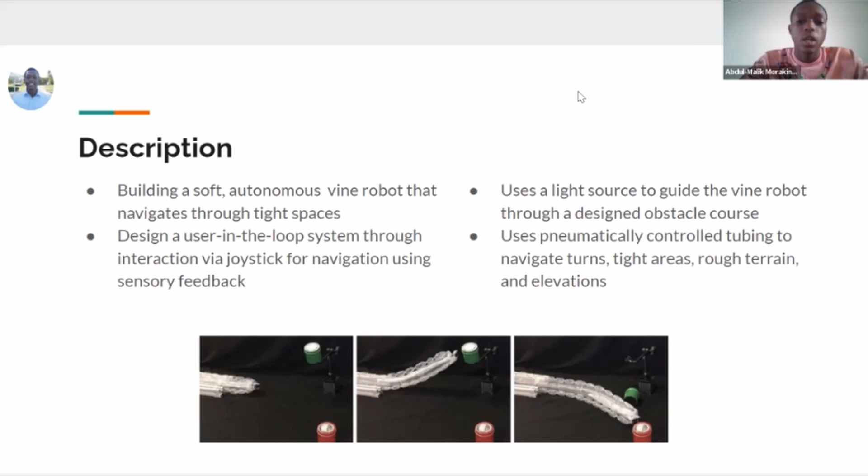The reason behind this project included being able to make a device that can navigate through hard to reach places. This can have numerous applications, such as in the medical field, being able to retrieve small objects within someone's body system, being able to retrieve certain artifacts during excavation sites in archaeology, and also being able to help victims of natural disasters such as earthquakes and provide instant relief.

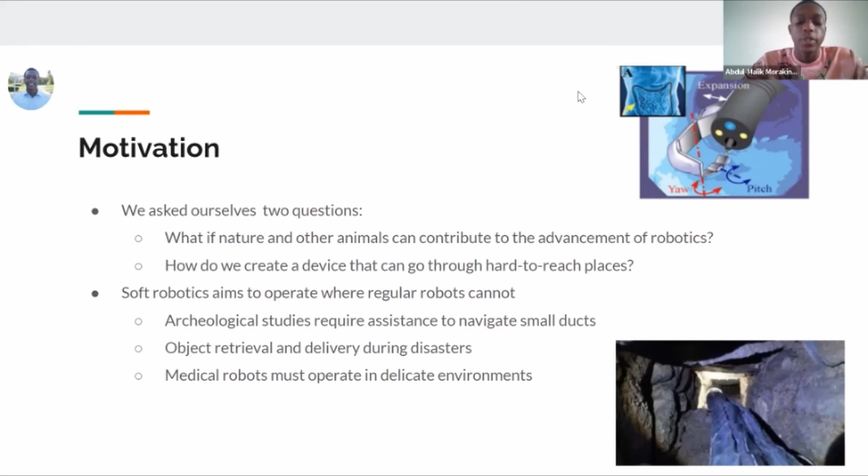Our project constraints are mostly economic and environmental, time and educational, and safety. With economic and environmental, it is hard for us to provide all the funds for this project, being college students. And also with the pandemic, it has also created a constraint on logistical issues.

With time and educational, it's hard for us to devote as much time as we initially thought, because we have other responsibilities as well with classes, jobs, and internships. And educational being the fact that we're still naive in how deep this field is, and we're constantly trying to learn as we go on.

And safety-wise, with soldering components, that could be a huge safety risk because we're dealing with high temperature. And also with the pneumatics, we're also dealing with high pressures. We could also risk other parts exploding depending on how we choose to manage the pressure.

Our goals and objectives, just to reiterate, is to design a robot that can navigate through tight spaces. We'll be using both manual and autonomous mode to help the robot navigate through the maze or the obstacle course.

For our stretch goals, we'll be using a gripper system that can easily retrieve objects at the end of the course. And also in the autonomous mode, we plan to use computer vision to program the way the robot moves through the obstacle course.

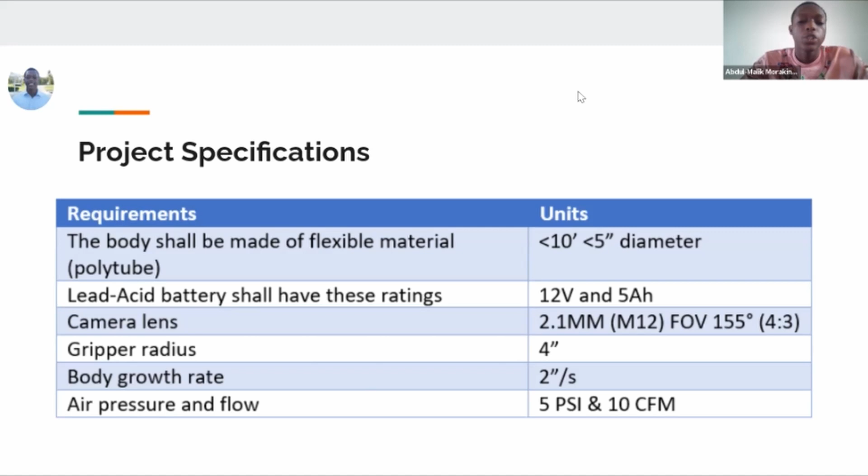Our camera lens will have a focal length of 2.1 millimeters, FOV of 155 degrees. Our gripper radius should have 4 inches, body growth rate of 2 inches per second, and air pressure flow shall have 5 pounds per square inch and 10 cubic feet per minute.

For our project, we have decided to split the major tasks amongst ourselves. Juan will be mainly in charge of the electromechanical design of the project, while Mohammed will be primarily in charge of the PCB design and testing. I, Abdul, would also play a secondary role in this.

As for power design and testing, I primarily will be in charge of ensuring all the power design is accurate to the best of its abilities, and Juan will also provide additional help when necessary. As for the software design, which includes the GUI, Kevin will be mainly in charge of getting it to work and run.

The spool motor and cap connect back to the PCB. The PCB is what allows the motor to be powered up and controlled. The sensor readings are also sent to the PCB, which is then sent to the PC via USB serial.

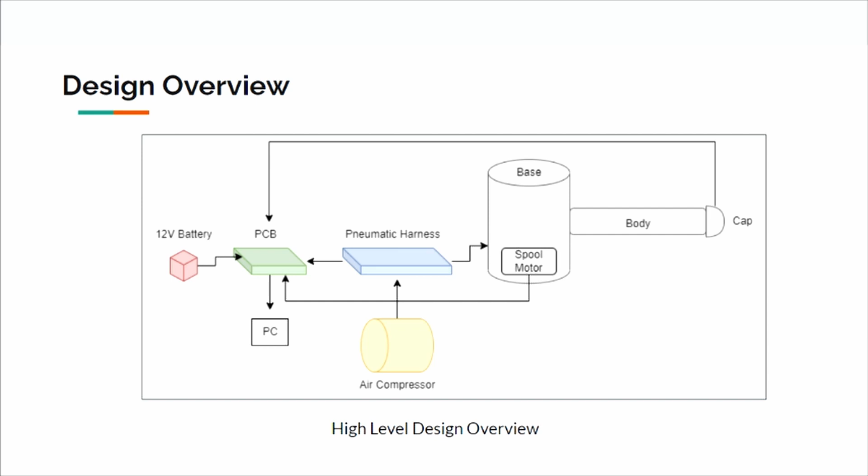So this is our block diagram. Starting from the top left in yellow is our power subsystem. Then in red is our camera and video processing subsystem. Then in gray is our motors. In blue is our pneumatic subsystem. In white is our custom PCB control board. In orange is our robot controller. And in green are our sensors, not including the camera.

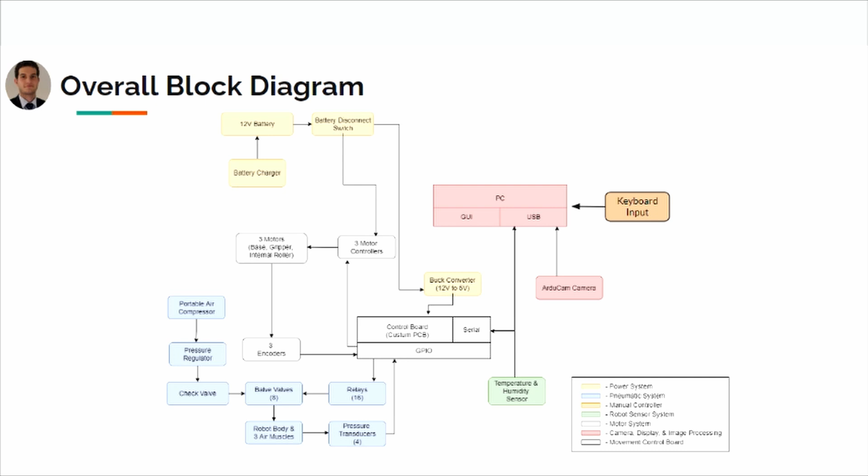Moving on to the mechanical design, the robot body is the part of the robot that is going to be lengthening and retracting. Then the artificial muscles, or SPAMs, are going to be lining the diameter of the robot body and are actually going to steer the robot in any direction that we want in 2D space.

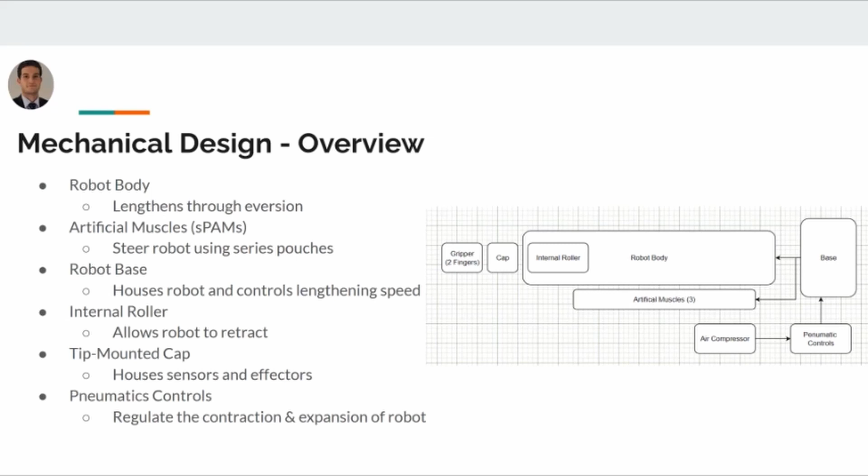The robot base is what houses the undeployed part of the robot, and it also serves as a pressure chamber for the robot body. The internal rollers are at the tip of the robot body, and they aid the robot in retracting onto itself. The tip-mounted cap is actually part of the same assembly as the internal roller and serves as a solid surface for us to mount our sensors and effectors. And the pneumatic controls are the part of the robot that controls all the pneumatic actuators.

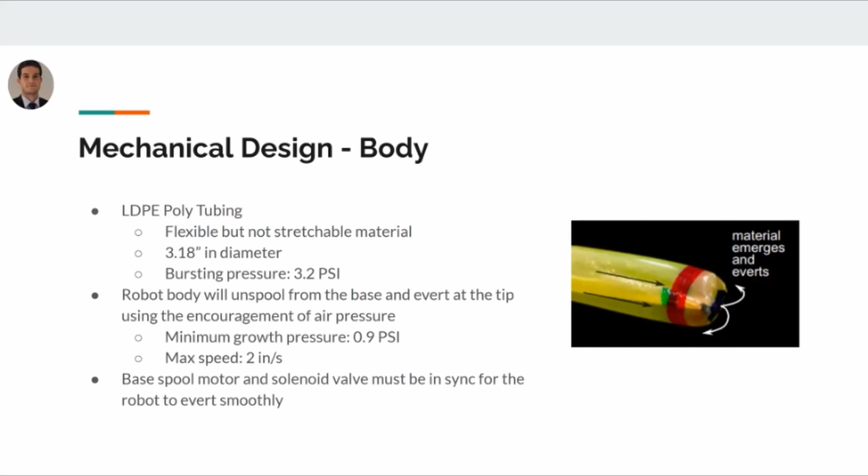Basically, when we pressurize the robot body, it will lengthen by everting itself. The pressure that we need in order for the robot to lengthen is about 1 psi, which is good because our max bursting psi is about 3.

When we were picking the material for the robot body, we needed something that was flexible but not stretchable, so that it would not change size from one deployment to the next when it's pressurized. We could have gone with LDPE polytubing or TPU coated nylon fabric, which is similar to the fabric that backpacks are made out of. The problem with the fabric is that it is about 4 times more expensive than the LDPE tubing, and it also doesn't come in tubular form, so we would have to sew it and heat seal it in order to create a tube, and that's why we went with LDPE polytubing.

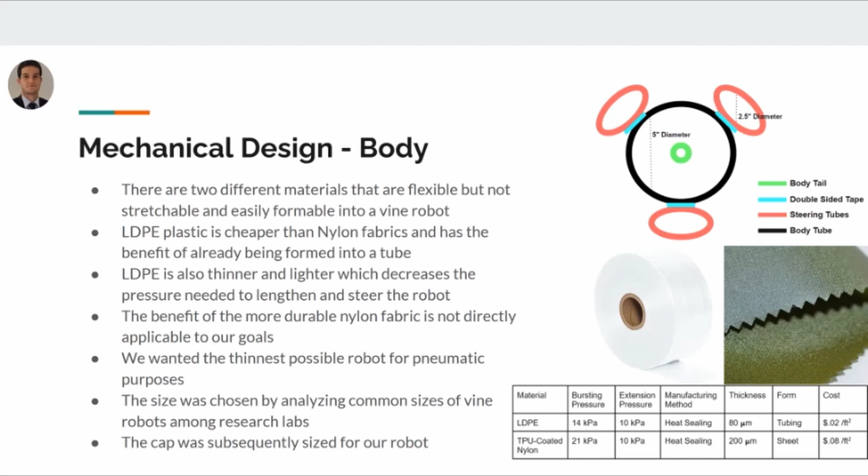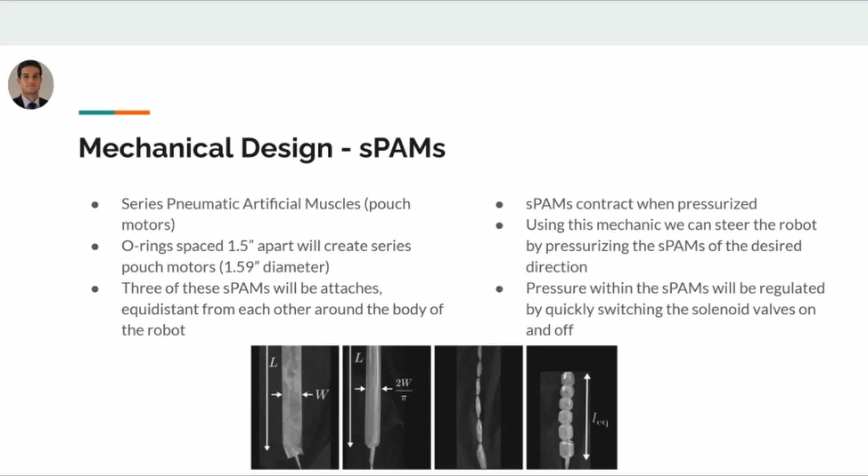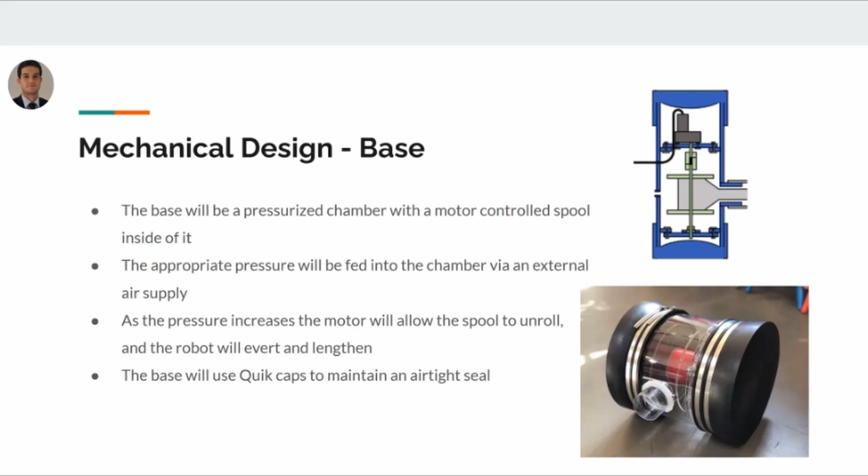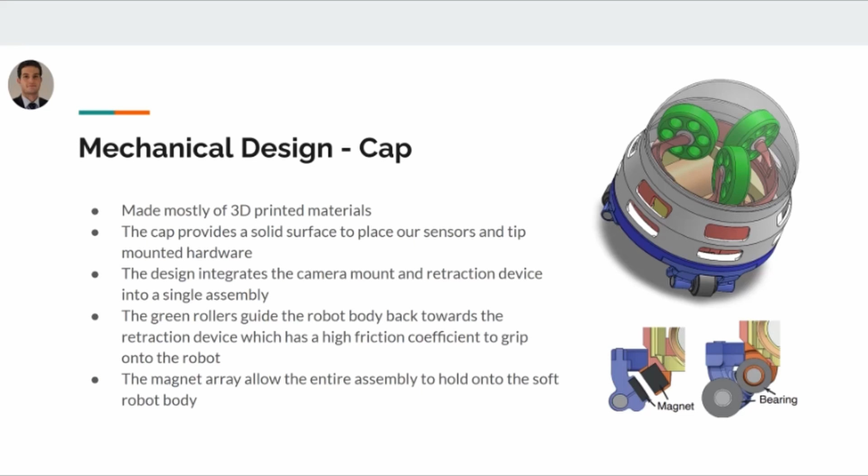The cap is the most intricate part of this entire robot as far as mechanical design goes. It has to be attached to the robot, but also able to slide up and down the material. So in order to attach it, but not permanently, we use magnets and ball bearings. Inside this cap is actually the internal rollers, which you can see here. The internal rollers are coated with this high friction material that is used for us to be able to grab onto it and push the robot material back onto itself.

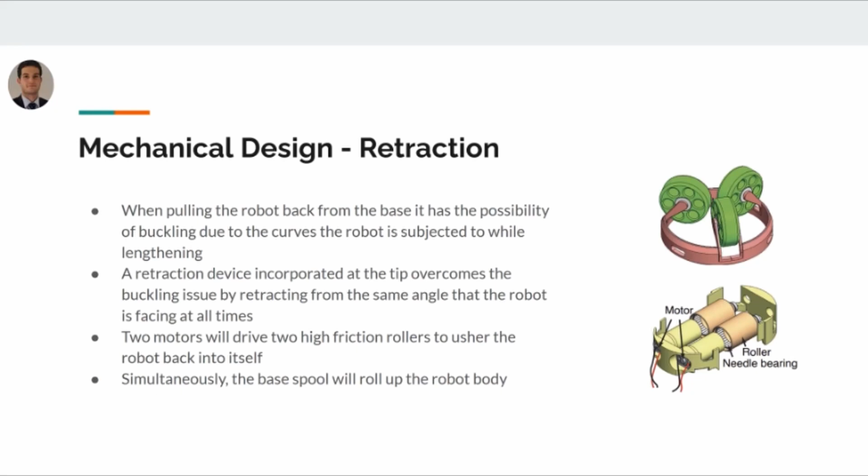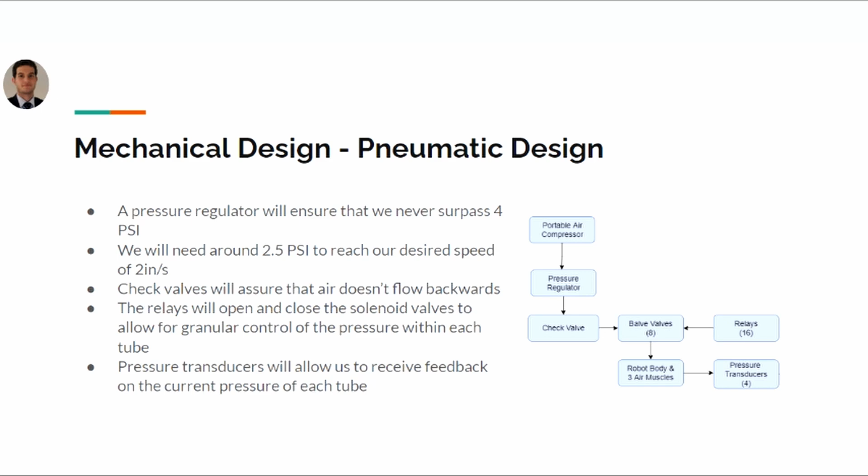So for the pneumatic design, we built a harness that has 4 ball valves, 4 solenoid valves, and 4 pressure sensors. We tested this harness with the PCB and it's working properly.

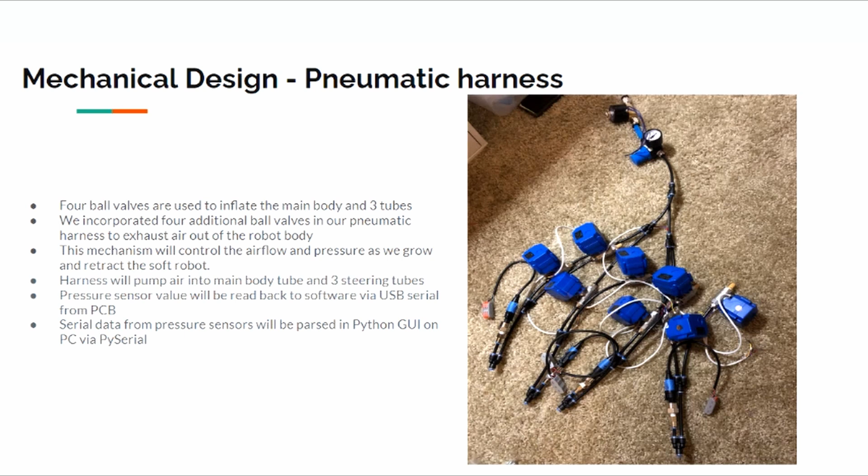The air compressor is going to pump air into the harness, and then we'll use the PCB to turn the pneumatics and ball valves on and off. That would allow us to steer the robot properly. And the pressure sensor values are going to be sent back to the PC via USB serial.

So for the hardware, we have an ATmega MCU that's being used to control the 3 motors along with the gripper motor, and we're also using that to control the pneumatics. We're also going to be feeding the sensor data into the microcontroller, which is going to be sent to the Raspberry Pi. The hardware also includes a joystick and a few buttons that would allow us to control the pneumatics and motors manually.

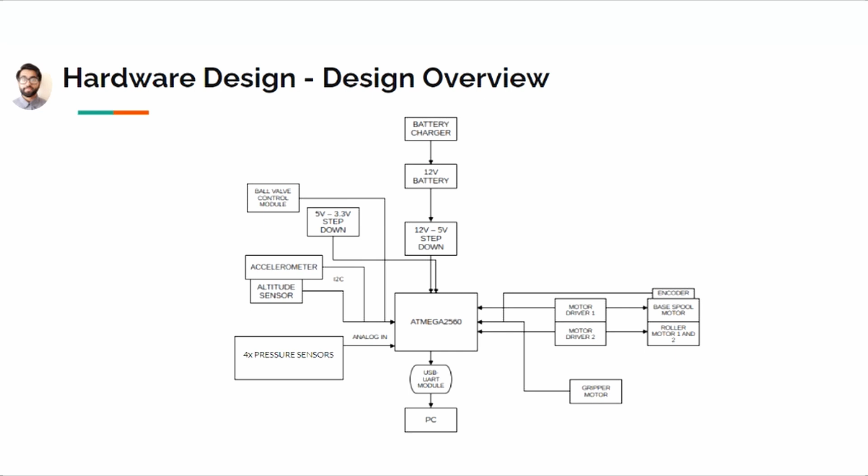So when picking our microcontroller, we were deciding between the ATmega 328, the 2560, and the Raspberry Pi. We decided to go with the 2560 as it gives us ample digital and analog inputs, and also has enough PWM outputs for the motors that we have. It also supports I2C, SPI, and UART. We're going to be using I2C and UART.

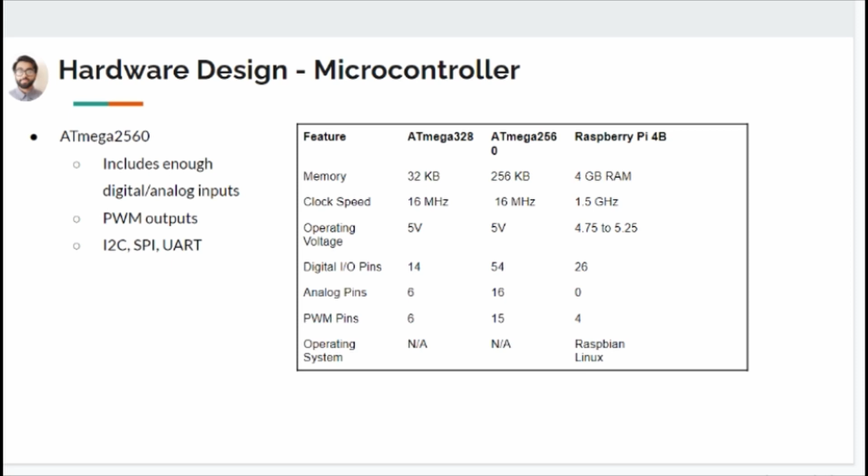So here's the schematic for our microcontroller using the ATmega 2560. We added an ICSP programming interface, which is going to allow us to program the MCU after it's been soldered on the PCB. We also added LEDs for power and serial communication. We also have a reset switch, bypass capacitors, headers for digital and analog pins. That's going to allow us to use any extra digital or analog pins in case we need some.

And we also added a USB serial interface using the CH340G chip that allows us to interface with any other serial device. We're going to be using this to send sensor data and any other data to the Raspberry Pi via micro USB.

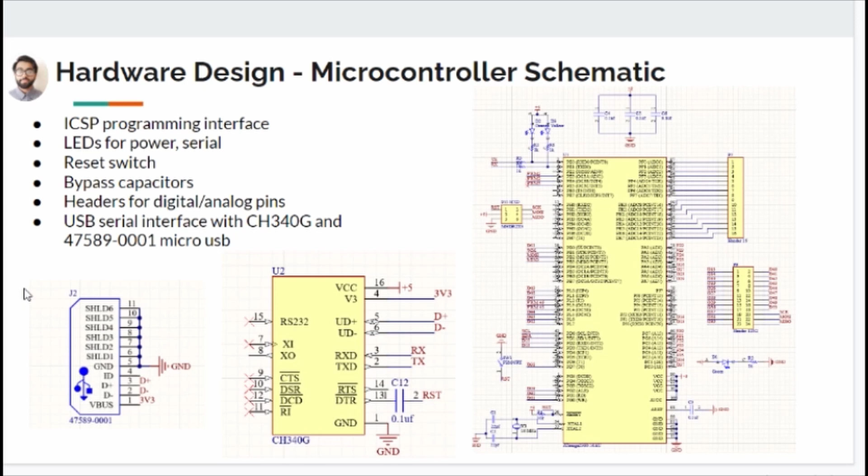So for the motors, we'll be using a 12 volt squareface gearmotor that's going to be placed at the base and will be used to drive the spool. As the motor goes clockwise, it's going to have the spool go in one direction, and when it goes counterclockwise, it'll go the other direction, as seen in this diagram over here.

And we'll also be using 2 metal gear motors for the roller motors as seen over here. Those will be placed at the tip of the worm and will help with retraction and growth. We also have an SG90 servo motor that's going to be used as the gripper of the robot, so that will assist with gripping items.

And to drive the 2 gear motors and the square face gear motor, we'll be using an L293 motor driver, along with motor encoders for all the motors.

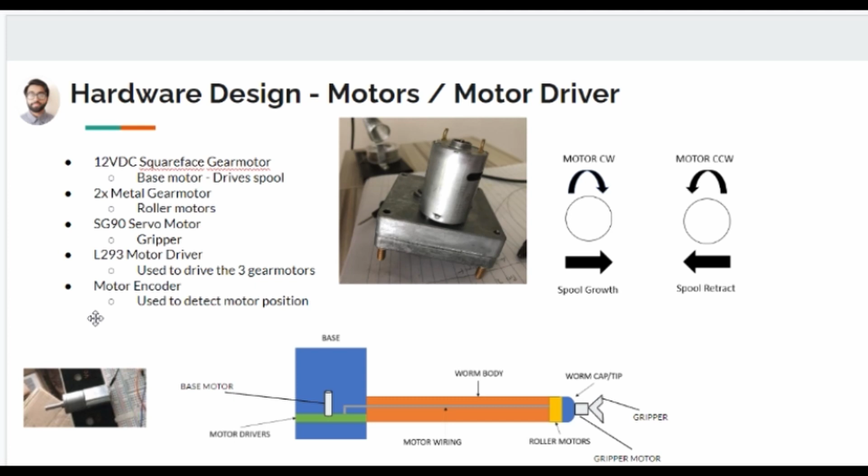So this showcases the motor schematic. We're using 2 L293 motor drivers. We're using 3 PWM inputs here because we have 3 motors that need to be driven, and the output of all these motor drivers go to this header over here, and this will connect to the 3 motors.

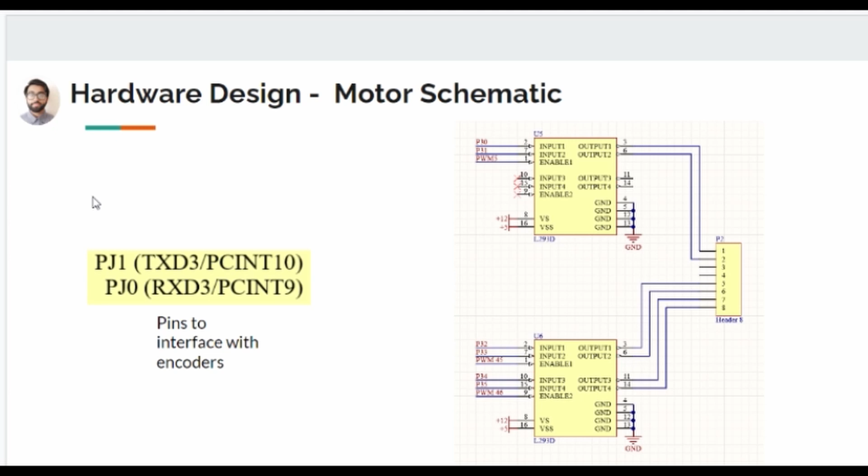We also have decided to use interrupt pins 10 and 9 to be used to interface with the encoders. So we'll be using these pins to read the encoder value of the motors.

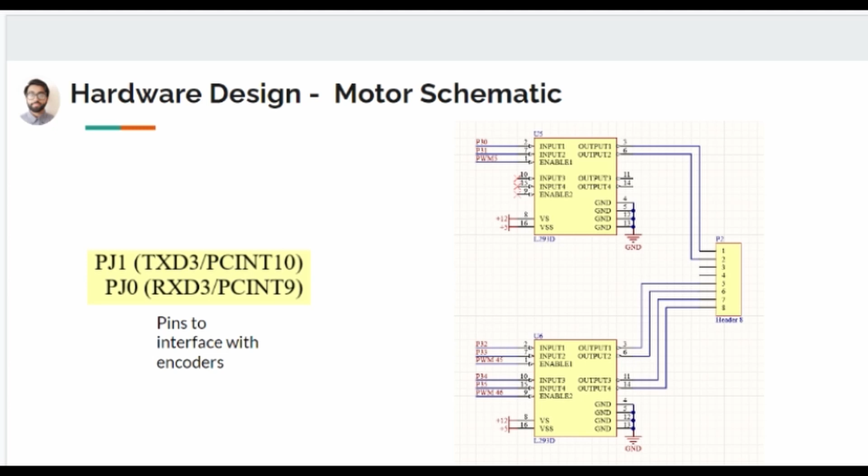So here's an overall block diagram of all of our motors. So we have the MCU here, and that's going to be used to send the PWM inputs to the motor drivers. As you can see over here, we're using 3 motors, so we have 3 motor outputs. One motor driver will be used to control the 2 roller motors, and the other will be used to control the base motor.

And for the SG90 servo, we're going to have that connected to a digital pin along with the 5-volt and ground straight to the MCU. We'll also be incorporating a motor control switch that's going to let us switch the position of the spool motor.

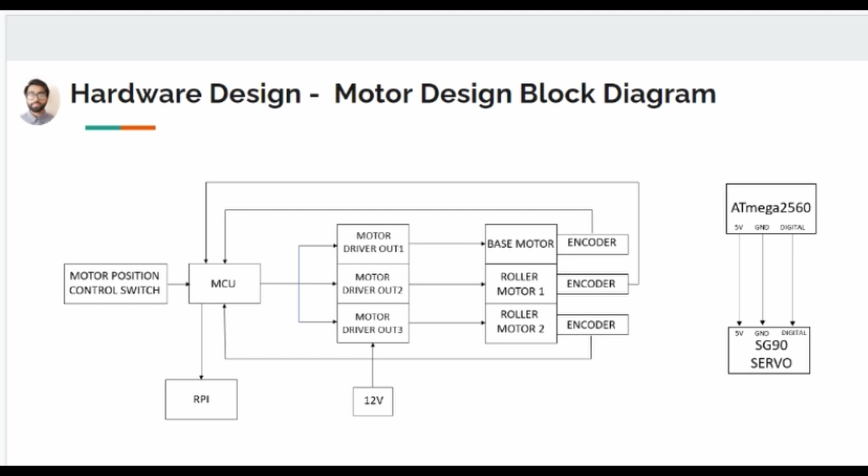And so for our altitude sensor, we'll be going with the MPL3115A2, and it's going to be sending data to the ATmega 2560 over I2C.

This is going to let us send temperature data along with altitude and pressure data to the Raspberry Pi. The MCU is going to be writing serial data to the Raspberry Pi, which includes the sensor values, and that will be displayed on the user interface as seen over here.

The sensor is going to be placed on the worm cap, so all the readings will be coming from the tip of the worm. As it expands and navigates, it'll be sending back all that data from the tip.

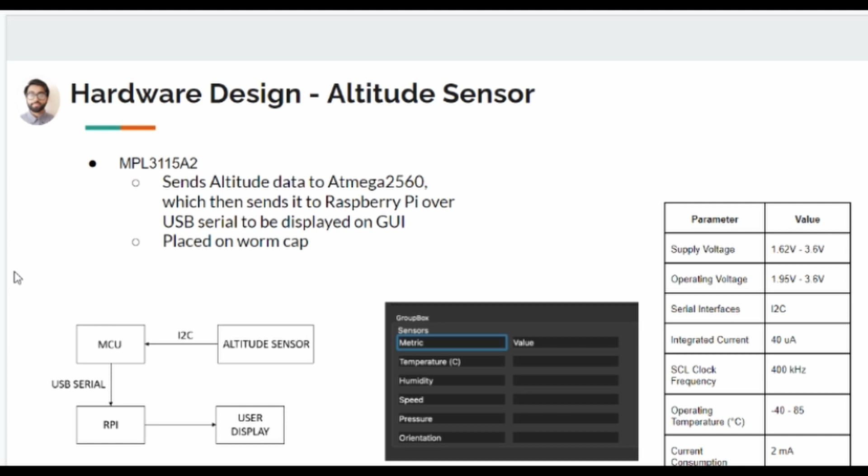To be able to use that sensor, we had to design a logic level conversion circuit, as the altitude sensor is a 3.3 volt device and the ATmega 2560 is a 5 volt device. So we used the BSS138 N channel transistor, which allows us to convert that 3.3 volt signal coming from the sensor to a 5 volt signal.

On our PCB we have a header with the 3.3 volt power and ground and the SCL and SDA, and that would be used to connect to the sensor.

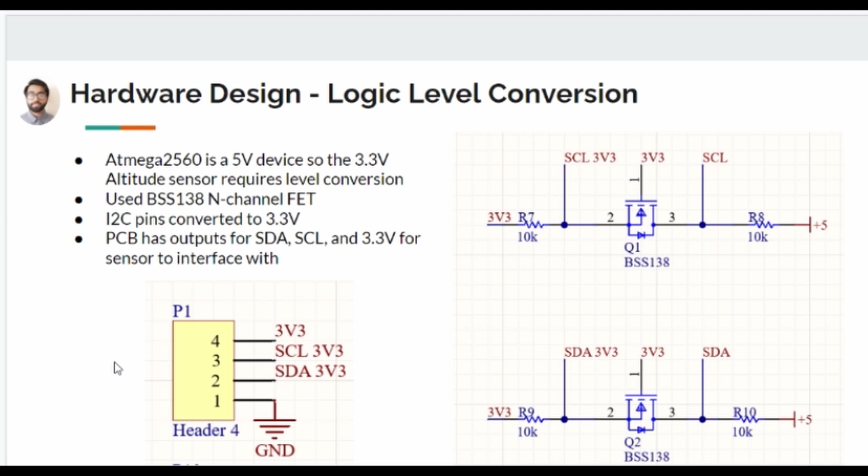For our main power source, we'll be using a battery, and we researched different types of batteries appropriate for this project. We ended up with two main batteries, the precision lead acid battery and the LiPo battery. After a detailed comparison, we decided to go with the lead acid battery because it's much cheaper, provides a higher amp hour rating, and the chargers are also very cheap and cost effective.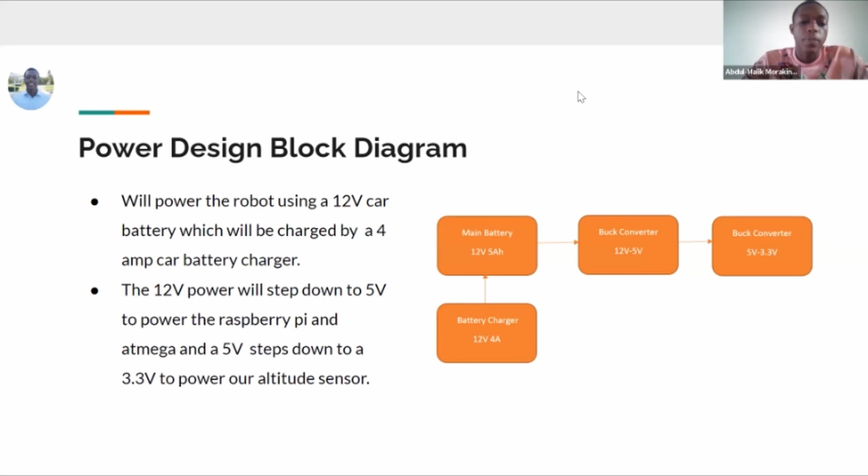We also plan to use two buck converters, which would reduce or step down the voltage to power a Raspberry Pi and altitude sensor. And here's the more intricate design of our power conversion.

As you can see, we designed this using Autodesk Eagle. We plan to use our 12 volt battery to power motors and pneumatics, our 5 volts, which will be stepped down using a power converter to power the MCU, and our 3.3 volts, which will also be stepped down to power the altitude sensor.

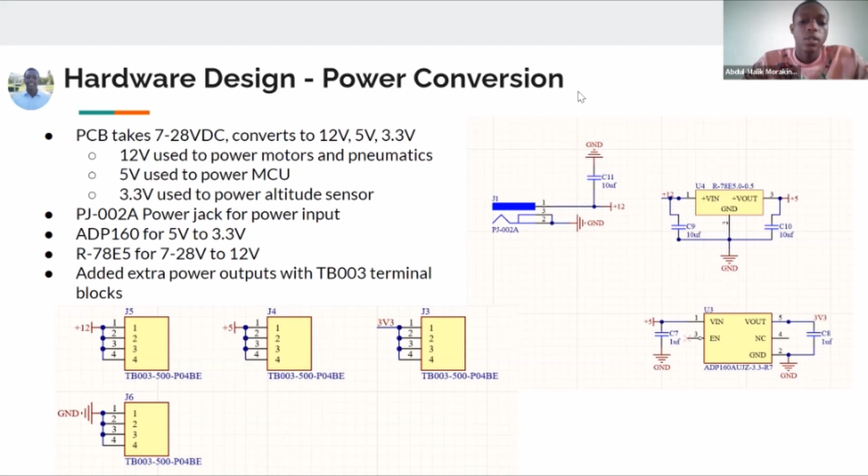Different functions as well, depending on how heavy the electrical load can be. So this is the overall PCB schematic, which includes all the schematics that were discussed previously.

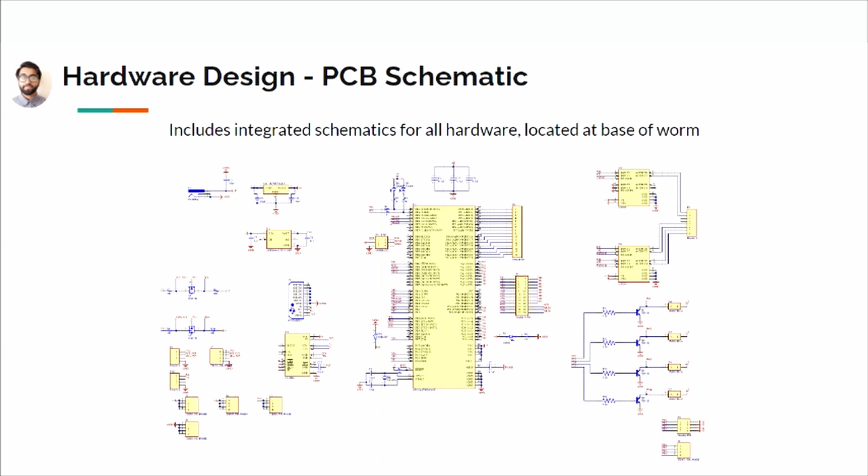This is our PCB board layout, which was designed in Altium. The left side is the top layer and the right side is the bottom layer. We utilized polygon pours to make the power and ground more spaced out and more efficient.

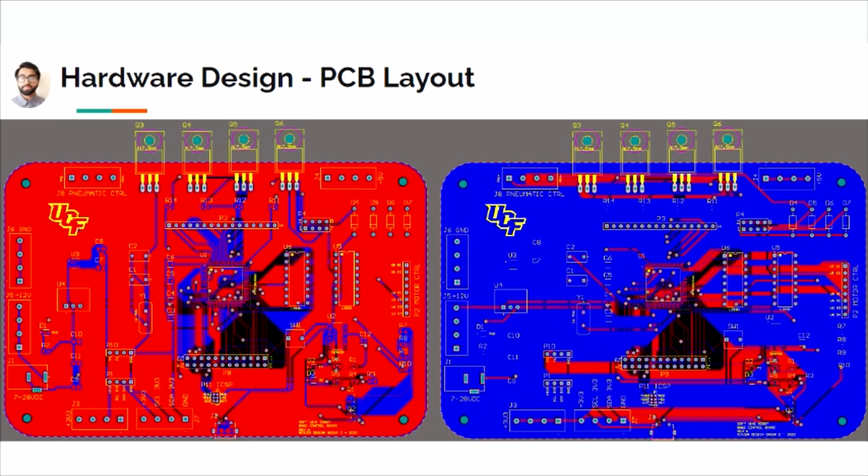Here's a 3D CAD model view of the PCB. There's a power jack. We also have a micro USB connection here.

We also have various power sources that are going to be used to power our devices. So we have a 3.3 volt power source, 12 volts, ground, and 5 volts here.

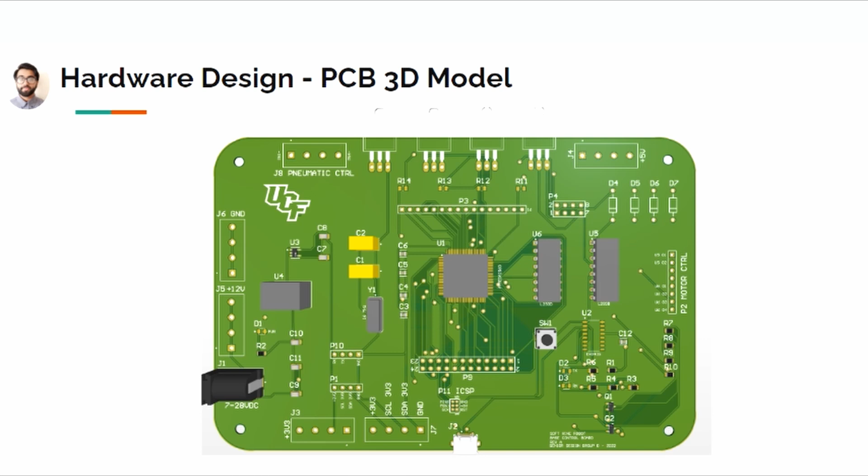This will facilitate the communication between project components. It also allows the user interaction and for the user to get some feedback from the sensors. It also handles the computer vision aspect of the autonomous navigation in this project.

For the user interface, we're going to implement PyQt, the Python framework. It presents the user with live feedback from all the sensors, including feedback from the camera, so the user can navigate the space.

The robot will have a manual mode and an autonomous mode. For the manual mode, the software GUI is going to write bytes to the PCB that are going to have it either go left or right, or grow or deflate.

We'll be using WASD and other keyboard inputs to control the robot manually. The sensors send feedback to the PCB, which writes that sensor data over USB serial. That data is parsed in the Python software and displayed for the user to see.

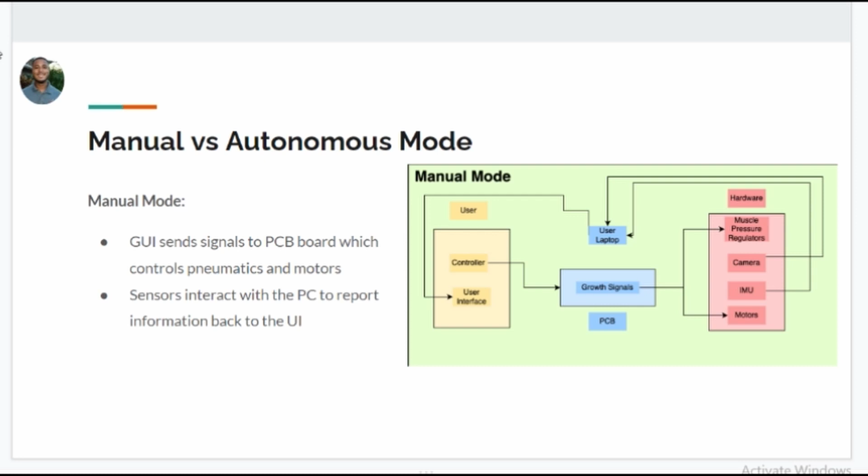For the autonomous mode, the PC handles all the image processing, and depending on the location of the object, the algorithm sends signals to the PCB to follow the direction of the object. For the sensor signal transmission, sensor data is received and transmitted among the PCBs via I2C.

Transmission data is transferred among all PCBs all the way to the UI. Controller signals are received by the main PCB and used for motor and pneumatic control. Here on the right, we can see how the transmission and controller class interact with each other, as well as with the sensors and the PCB.

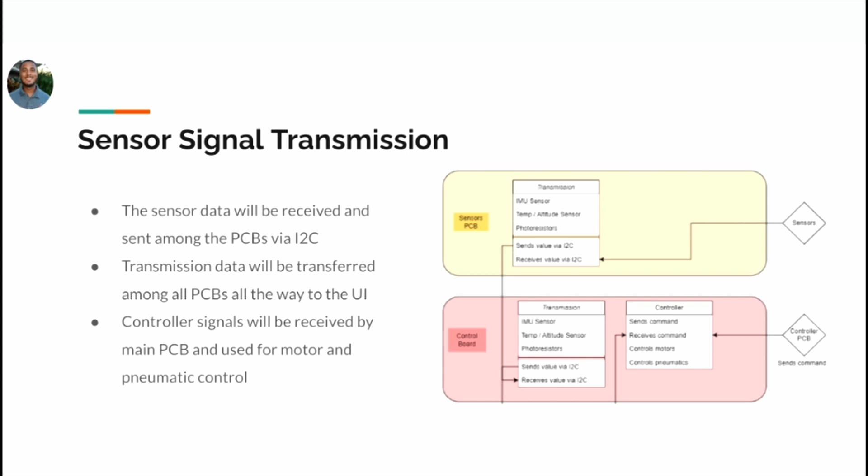For software integration, we're developing a GUI that will allow us to control the robot. We use libraries such as OpenCV, PyQt6, and PySerial. We also use Qt Designer to develop the GUI.

We also developed C++ code for the ATmega2560, which controls the various digital and analog pins on the MCU. We also use Visual Studio Code to debug the code.

We can also select the port of the USB serial, which allows us to connect to the PCB and control the robot.

We can control the ball valves, opening, closing, and pausing them to control the pressure flow. We can also control the motors, having them go forward, reverse, turn them off, and control the speed.

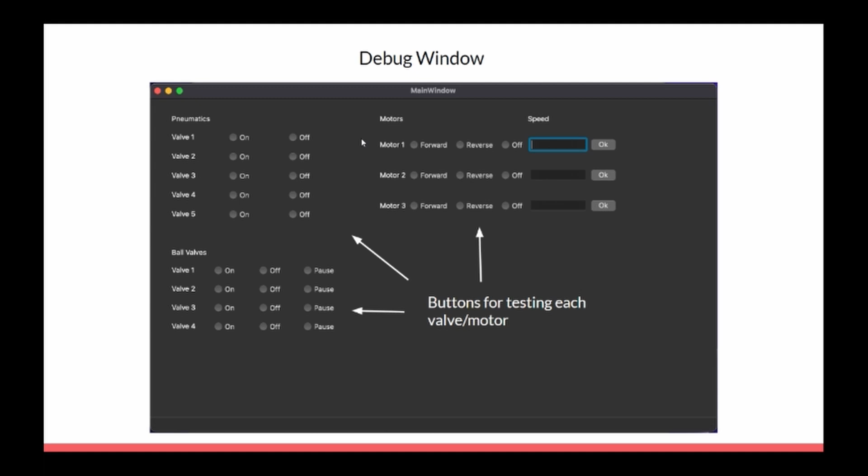Here is a prototype testing setup. This is what we set up to test various components with the PCB and test to see if we can inflate the tubing and have it steer.

With the help of the test setup we made, we were able to successfully grow the robot using the software GUI. By pressing the W button, we were able to start the motor running and open up the ball valve to inflate the robot.

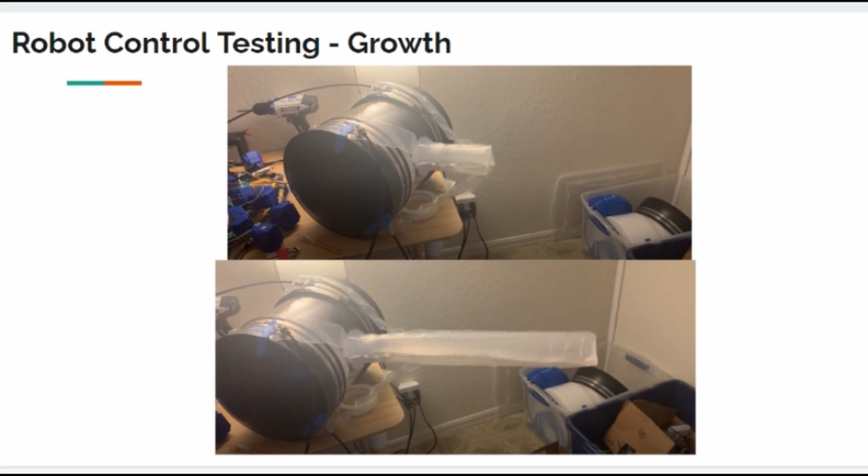We were able to have it grow, and we can also stop the robot with the keyboard input, which closes the ball valve. To steer the robot, we used keyboard input to open and close specific ball valves for the tubes.

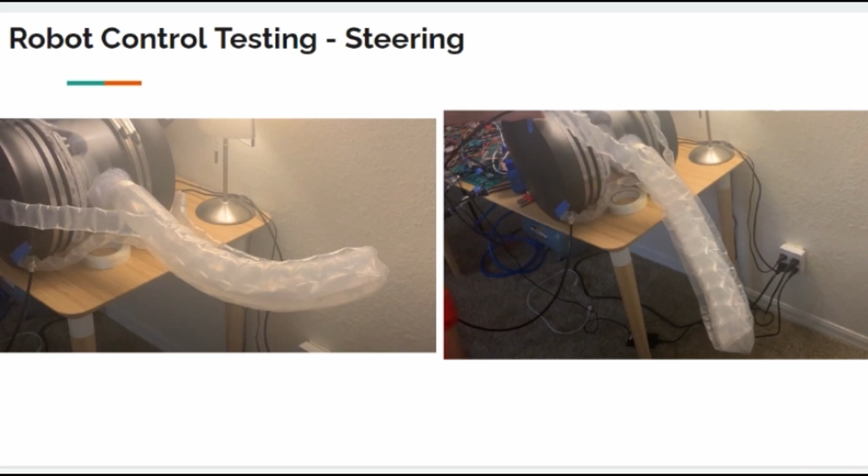We also tested the cap of the worm by inflating the body and then steering the worm in different directions, then looking at the feedback through the camera and the sensors.

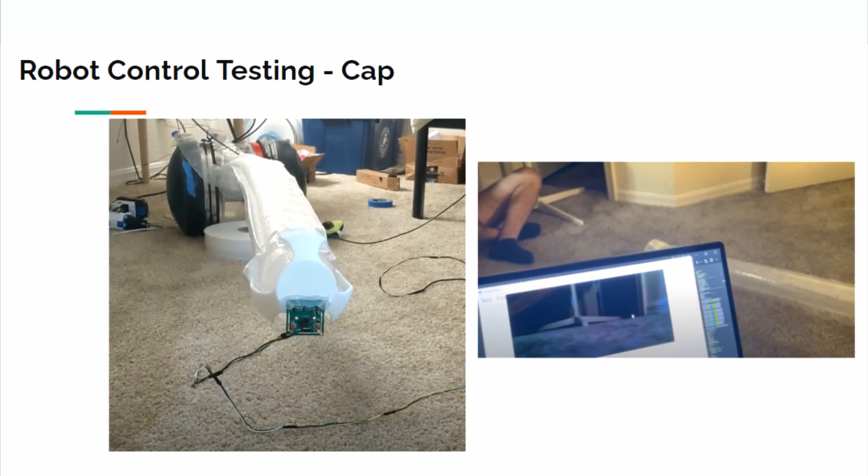In this project, we succeeded in developing a fully airtight base and body that could be inflated and deflated. We also succeeded in completely manually controlling the robot in all directions. We also succeeded in having a PCB that can read all the sensor data through the analog inputs and also control the motors and ball valves.

We also developed Python software that can interface with the PCB via USB serial and write and read data. We also succeeded in developing a pneumatic harness that can inflate and deflate the body and its tubes.

For the difficulties, due to the time constraint, we weren't able to integrate the roller motors, which are used for retraction, and we weren't able to make the robot fully autonomous.